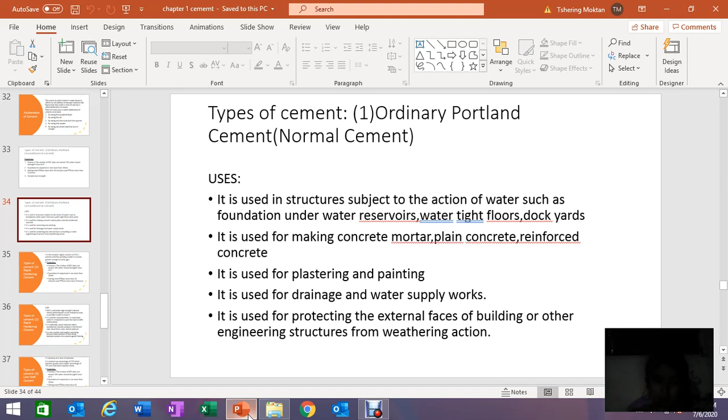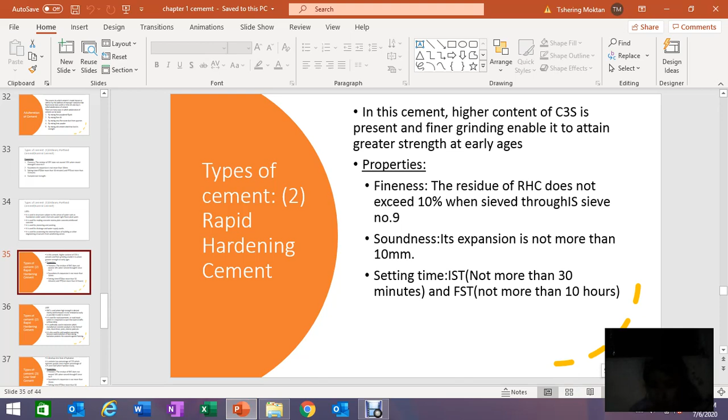Good morning, students. This is your lecture 6 of concrete technology. So, last class we had studied about types of cement, right? In there, we finished studying about ordinary Portland cement, and now we will look at the second type of cement, and this cement is also known as rapid hardening cement. Also, we call it RHC in short form.

Okay. So, what is the speciality of this cement? Let us see. In this cement, high content of C3S is present, and finer grinding enables it to attain greater strength at early ages. If you remember when we studied about Bogue's compounds, we studied about C3S, that is tricalcium silicate, then dicalcium silicate, C2S, and we had studied that C3S is more responsible for early strength, and also C3S develops high heat of hydration compared to C2S.

So we know that C3S hydrates faster and gives more heat of hydration, due to which early strength can be achieved faster. Because of this reason, C3S content is more in this type of cement and C2S is comparatively less. Why? Because if you look at the name of the cement, what does it say? It says it is rapid hardening cement. Rapid. What is meant by rapid?

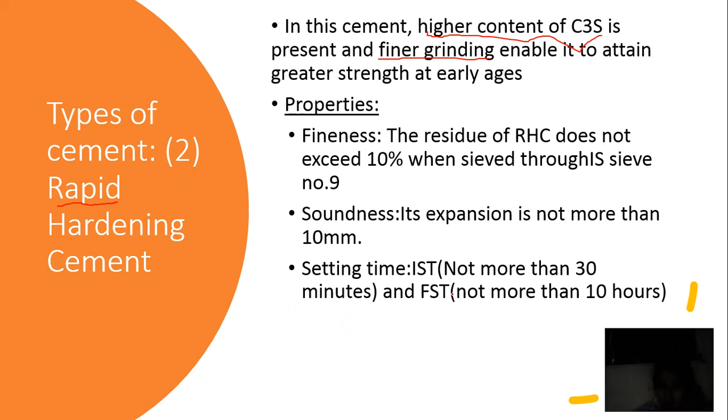Now let us see the properties. Properties are similar to OPC only. That is, its fineness should not exceed 10%. Not more than 10%. Soundness should not be more than 10 mm, similar to what we studied in OPC. And its initial setting time is not less than 30 minutes. Final setting time not more than 10 hours.

Now let us see the uses of RHC. Since we know that RHC hydrates faster and hardens faster, and we can achieve early strength very fast, obviously RHC will be used for those works where we want something fast, where we want the concrete to set fast. For example, if we have to repair a road, let us consider a concrete road. When it comes to repair of road, we want everything as fast as possible, right?

Because the road is used by vehicles, and vehicles don't travel today and stop tomorrow. They keep on traveling continuously, which means for road repair or construction we want something that will give fast results. So in such a case we can use RHC. Why? Because RHC hardens fast and achieves early strength faster. So let us read this.

RHC is used where high strength is desired shortly, ठीक है, जहाँ पर high strength जल्द से जल्दी चाहिए, and formwork is to be removed as early as possible in order to reuse it. Now this point, I don't know if you have studied this word or not, but let me explain. Formwork क्या है? Formworks are the temporary structures in which concrete is poured.

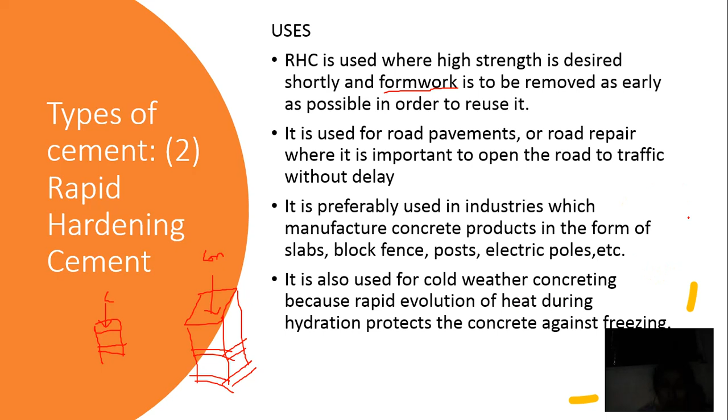Now the third type of cement we are going to study is low heat cement. In short we also call this cement LHC. I would want you guys to remember the abbreviation of these cements, because most of the time they might not mention low heat cement or rapid hardening cement. They'll just say OPC, RHC, LHC. So you should know the abbreviations of these cements and you should also know the full form of these cements. Alright, now let us see low heat cement.

First point, it develops less heat of hydration.

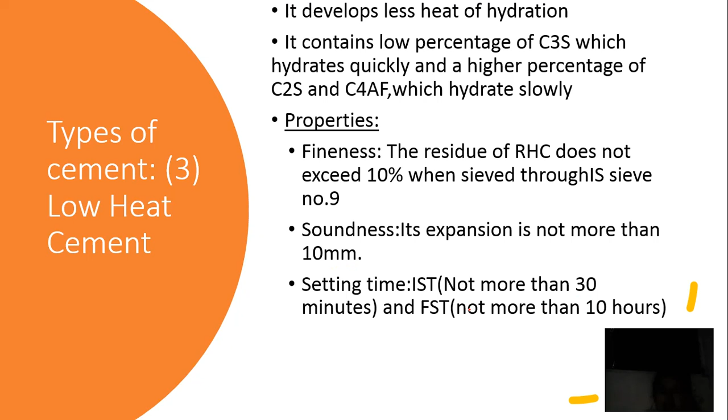So now let us see the properties. Properties are more or less the same. The maximum fineness that's allowed is 10%. Soundness: its expansion is not more than 10 mm. Setting time: initial setting time should not be less than 30 minutes and final setting time should not be more than 10 hours.

Now let us see the uses. Since it produces very low heat, let us keep that in mind, low heat cement produces very less heat like the definition says. So obviously it will be used in such structures which demand less heat production. It is used only in large mass concrete works such as dams, bridge abutments and retaining walls. So where are low heat cements used? They are used mostly in mass concrete works.

Now why is it? Let me explain why. Mass concreting means very big structures like dams, bridge abutments and retaining walls. So whenever big structures are being constructed, the hydration reaction occurring will also be huge, because of which the amount of heat of hydration produced will also be very much. And we know that if the heat of hydration is too much, then it might cause cracks in the structures. For example, what actually happens is, if this is a dam, this is your dam.

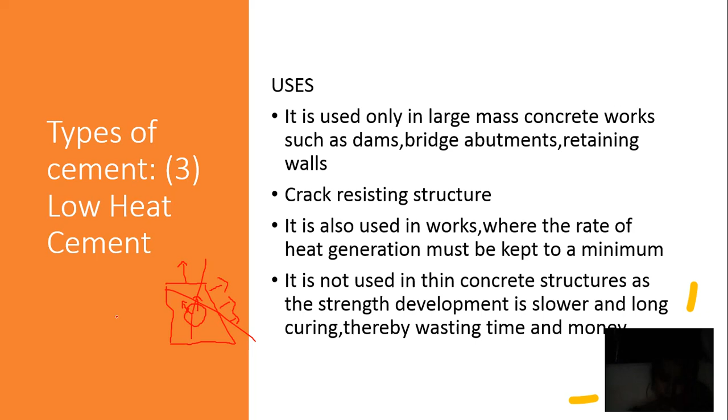So in thin concrete structures, we don't need to use low heat cement. Now let us see pozzolana cement. Pozzolana Portland cement is another very famous cement used apart from OPC. We call it PPC. Now let us see the properties of pozzolana Portland cement.

Pozzolana is a siliceous material containing clay up to 80%. So what is pozzolana? Pozzolana is actually a siliceous material, matlab it is like a soil. It has a soil type of property.

Okay, so it is like a material which is almost like soil wala property, and it contains very high amount of clay, up to 80%. So when this pozzolana is combined with cement, then it possesses very great cementitious property. It shows very good cementitious properties.

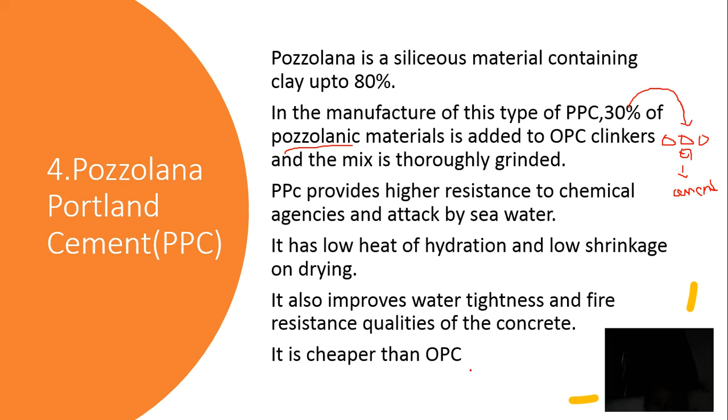Now let us see the uses. Pozzolana are used in mass concrete works such as in dam construction, massive foundation and bridges, mainly because pozzolana Portland cement produces low heat of hydration, because of which we can use it in mass concrete works. Then in sewer and sewage disposal works, even sewer or sewage pipes बनाने में भी PPC use कर सकते. Why? Because it has higher resistance to chemical attack.

Last one, it is mainly used in marine and hydraulic structures also. So any structures that are made in the water or in the sea water, in such situations also we can use PPC. Why? Because it shows greater resistance to chemicals found in seawater.

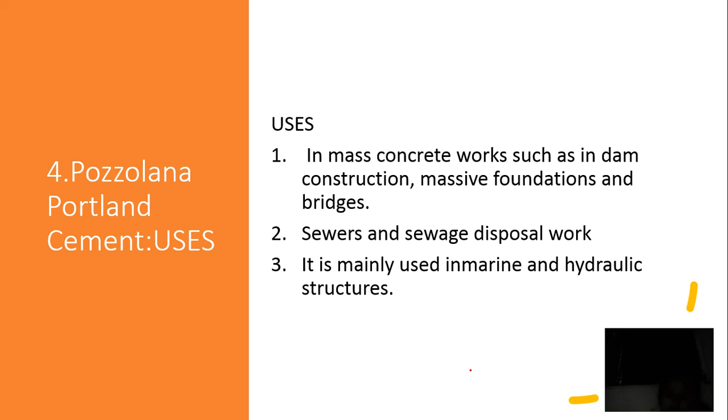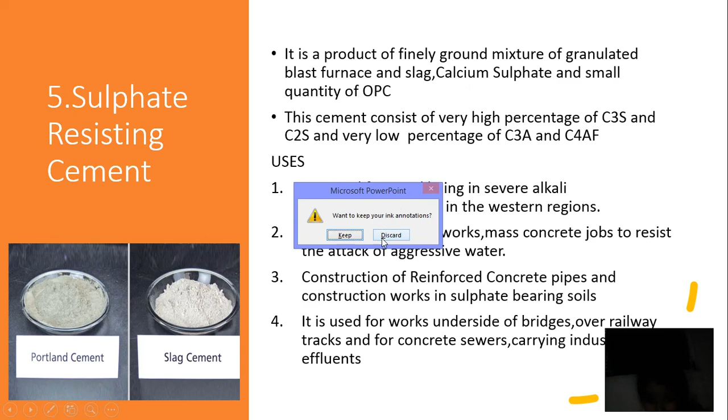So students, we'll keep our lecture up to here only, and next class we'll continue with sulfate resisting cement, and there are two or three more types of cement left.